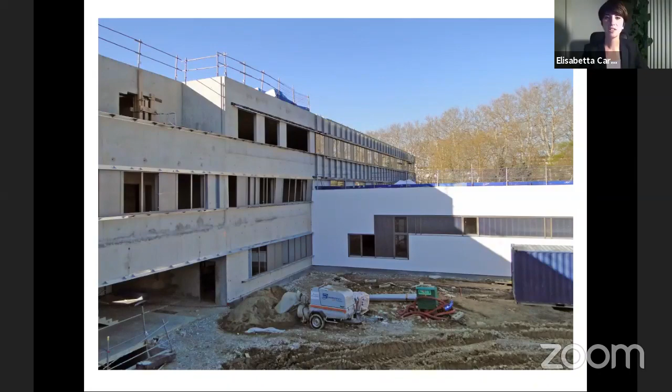And also I started realizing how our architecture was somehow a facade architecture. In many cases, I realized that there was the main material we were using, and then there was some facade material that was just concealing what we didn't want to see about our own design and our own constructions. And all of these things added up, and I started not feeling that well anymore about what I was doing. So I decided to take a sabbatical year, and I started wandering around South America, basically.

And at some point I was in the Chilean Andes, and there it was. I bumped into earthen architecture. That was a traditional way to build, and it made a lot of sense there because it's a place where it is virtually impossible to bring in material in order to build. So everything must just use what is right under your feet or just around you. And at the same time, it made a lot of sense, not only from a material point of view, but also when we look at the integration of this piece of architecture in its landscape, because it was made out of the very earth that was there. And you knew that one day it would be very easy to reintegrate it into the natural resource cycle.

And at the same time, this concealing idea was not there anymore, right? Every material was right there in its place with its function, but it was visible. So I was deeply fascinated, and I still thought it was something just folkloristic and that I would never see again when I went down from the mountains and into the city.

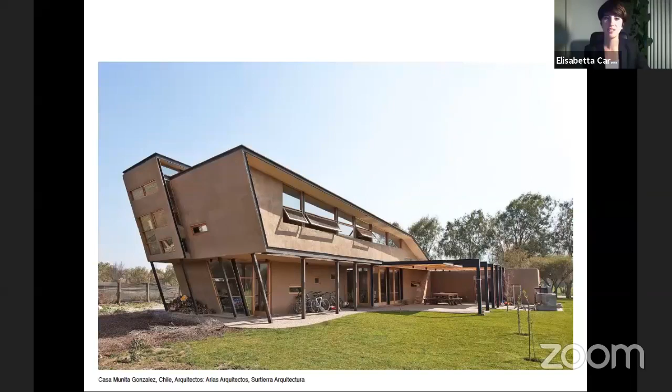But on the very contrary, I realized that there in Chile and in Argentina as well, there was a young generation of architects that was actually carrying on this material, because this material, earth, was never really out of fashion in construction. People were still using it, they never stopped. And therefore architects were trying to experiment with it and use it in contemporary design together with other materials, trying to literally reverse the use of the mud brick, like in this example.

So that was my aha moment. I thought, okay, this can be done actually, and it makes a lot of sense. It is an answer to contemporary architectural needs. I want to learn how to do it, and I want to bring this with me, and I want to diffuse this when I come back. So there it was.

I left the Andes for the Alps, and I moved to CRAterre. CRAterre is the largest world research center about earth. And it has a postgraduate cycle that lasted 2 years, where you basically are a group of 20 people from all over the world in love with earth, and you just keep learning and experimenting about this material.

I learned a lot, as you can imagine, about the material, about earth and heritage, but I wasn't really sure about how to use this material as an architect for contemporary architecture. How could I start the very same day to build with this material here and now? So together with another architect that had the same questions after this postgraduate, Annelise Antoine, we set up a research project.

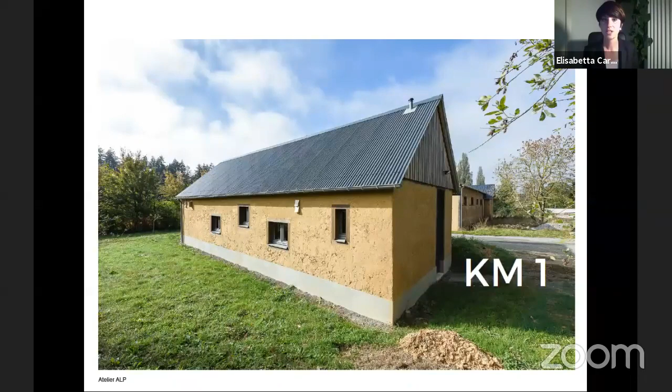First of all, earth is a local material. Local means really local. In very few cases, we are able to use the very same ground that we excavate in order to build, but in most cases, and I would say in any case where earth is used, earth comes from a very short radius. This means no transport. This also means that earth is an available material in an era where we are badly running out of sand, for instance, because of concrete construction. Having a material that is local and largely available is an asset, I think, for resilient architecture of tomorrow.

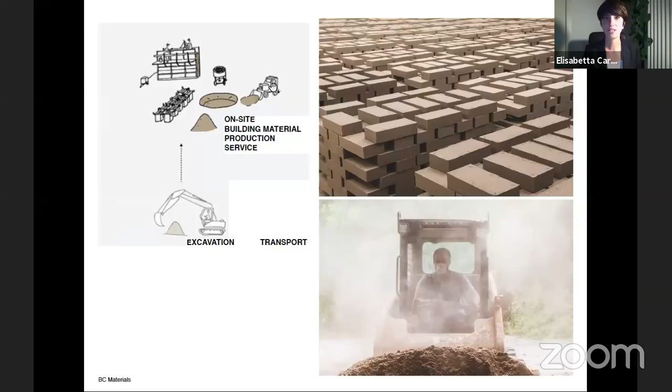Local also means that there are some pioneer projects like this one, BC Materials, a Belgian project from a Belgian cooperative. They are actually setting up an on-site building material production, so they are able to come to the site and to excavate and to produce the materials, like for instance the bricks or the plastering, just with the earth and just on site. This way they are minimizing really down to zero the transport, and I think it's an extremely interesting approach to construction, right? Nowadays our materials travel a lot of kilometers.

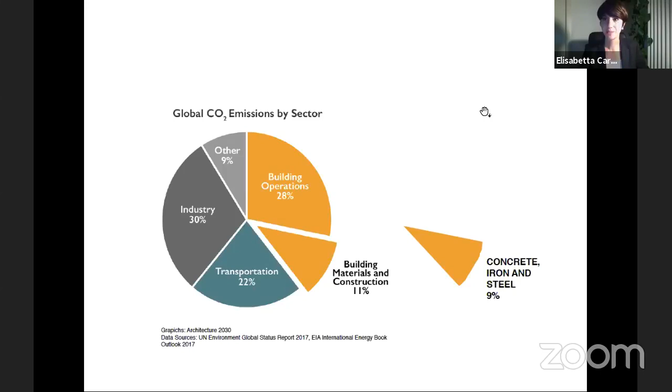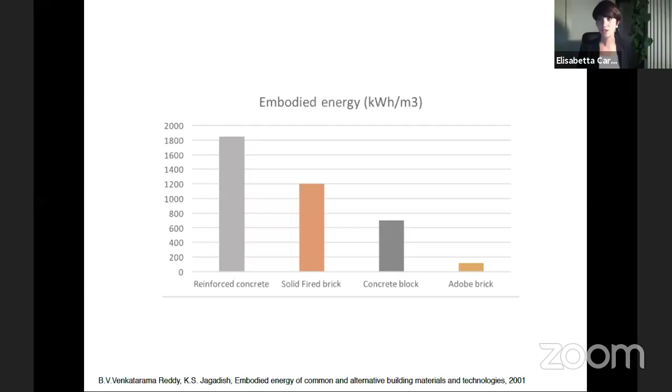Third, once we have built with earth, our building can be pretty energy efficient. I'm not saying earth is the perfect material, but it's a material that has very important properties that are really useful when we have to design our indoor comfort, our thermal and our moisture levels. First of all, it's a material that has a very important thermal capacity and thermal mass.

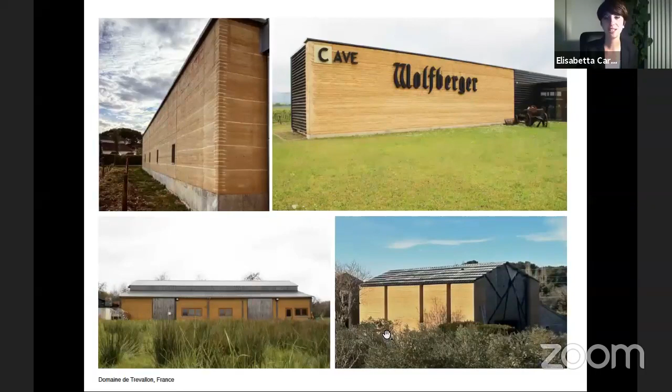And of course, it is very useful when we have to store something that we want to keep at a very uniform level of temperature and moisture. This is one of the reasons why we have so many earthen buildings that have to do with wine production and cider production, as you can see here. But also museums, of course, because what I have in a museum normally requires a very stable temperature and moisture level. But of course, we also want that for our homes, right?

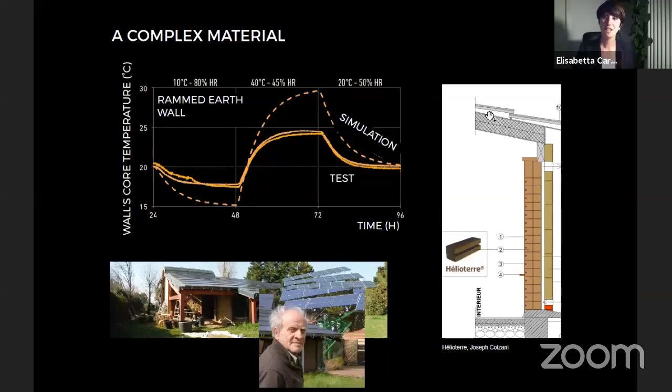Earth is one of the very few natural phase-changing materials. What is a phase-changing material? Laboratories are trying to synthesize very advanced synthetic phase-changing materials. These are materials that have some particles inside of them which are able to evaporate and to condense. This releases and absorbs energy, just the way we would like. When the temperature is going up, we have evaporation, and this evaporation absorbs energy. So if it's getting hotter, my wall helps my indoor climate to stay fresher.

And the other way, when the temperature goes down, these particles are condensing inside the building elements, and therefore they are releasing energy just when I need it. Well, as you can imagine, this fluid that we have inside of earth is water. There are some particles of water that are always present in an earthen wall, even when it's completely dry. They are always there, stuck in between the clay particles of earth. And this is why its thermal behavior is so interesting.

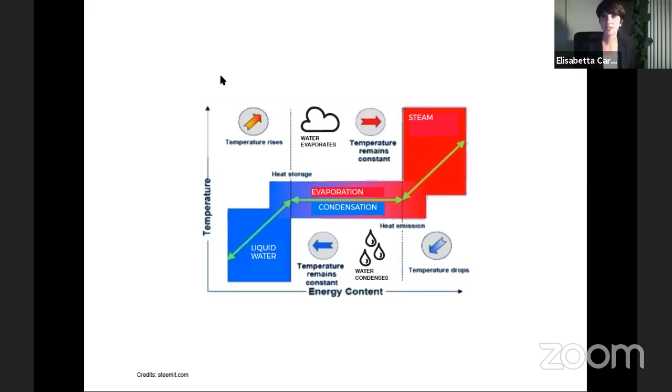And the fourth point about sustainability and earth is that it is 100% recyclable. This means it can really operate in a circular economy approach, a topic that is really hot nowadays. How can we make our economy circular? How are we able to minimize waste and reuse what we've been using already? This is very important, especially for us as designers, because 40% of the generated waste in the European Union is due to the building sector. It's enormous.

Okay, we are recycling, we are separating our garbage every day. We're doing really well, but then we are dumping an enormous quantity of non-recyclable material because of our buildings. So how can we revert that? How can we change this paradigm?

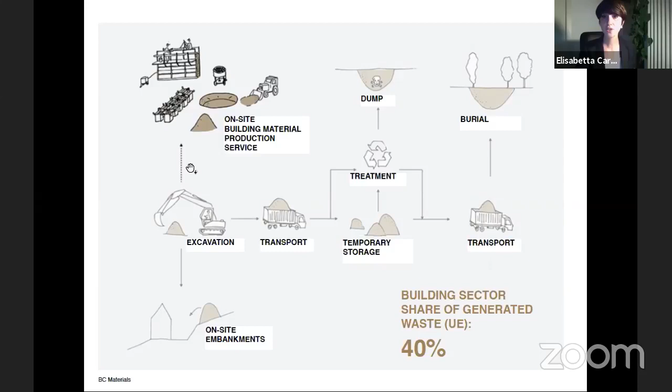Once again, I'm showing you another part of the project by BC Materials, this pioneer cooperative in Belgium. Not only are they producing materials on site, but they are also rethinking how, once this material has been used, when they have to dismantle an earthen building, they can actually reuse this earth, either giving it back to earth, which is what they propose here with the burial. So the earth is able to go back into a natural circle.

Another really interesting way to exploit earth recyclability is to use all of the excavated earth. Cities and countries in general tend to excavate enormous volumes of earth. And this earth is considered as a waste material, as a useless material that is going to a dump. It even has a cost to be disposed of, instead of using what could be a perfectly suitable building material.

1 year ago, finally, a project was set up in order to try to avoid this crazy dynamic. The name of the project is Cycle Terre, Earth and Cycle. It's a European funded project and it takes place in the metropolitan area of Paris. The metropolitan area of Paris is extending its underground network. This means kilometers and kilometers of tunnel are going to be excavated between now and 2030, which means 400 million tons of earth are going to be dug out, excavated.

So this project thinks about what to do with this earth. How can we use it as a building material? So the project put together a series of stakeholders, of partners, which are, of course, researchers and architects, but also real estate developers that are actually being taught how to use this material later on in their projects.

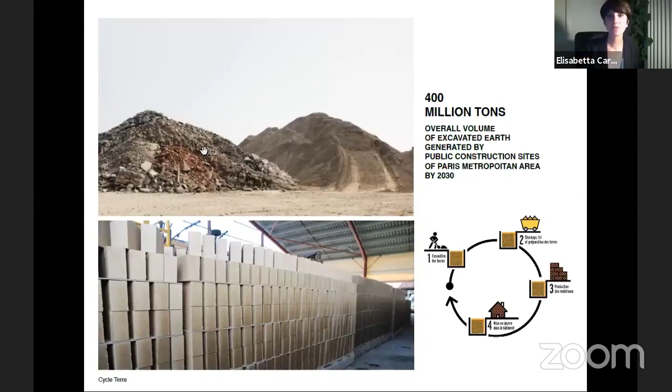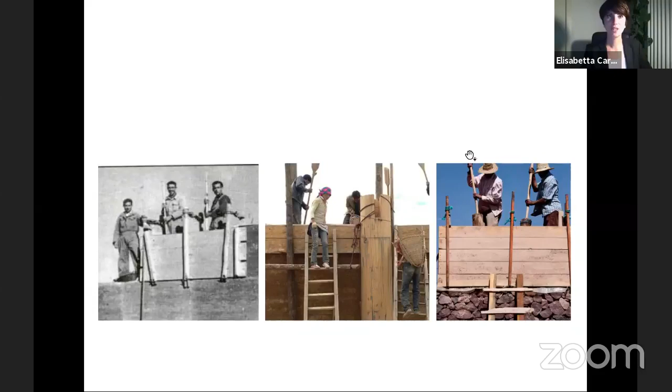Here you can see some Catalan rammed earth workers. As I said, until the 70s we have traces of buildings that were built with this material. And it is very curious that the rammed earth technique is actually the same technique that is used also in Asia, this picture is from Korea, or in Africa. It is really the very same technique developed in different corners of the world. And sometimes having this heritage can really be a trigger for building with earth.

It's the case for this enormous project that I'm really glad I'm helping with. It's in Saudi Arabia, next to a heritage site which is built with adobe. And the government decided that they would build an enormous extension around this heritage site that would all be built with earth.

It is going to be a very big project, but also a very big challenge for earth to answer contemporary needs, because this area will have, of course, museum, but also residential spaces, and they will have to keep with contemporary building standards. All of this with adobe, which is probably the most forgotten earthen technique in contemporary architecture. You see everywhere rammed earth that is on trend.

Adobe bricks need a lot of surface in order to dry under the sun, and this is why they are really not matching our industrialized building culture. But it is a technique that has a lot of potential, and I really hope this project will help showing and demonstrating this.

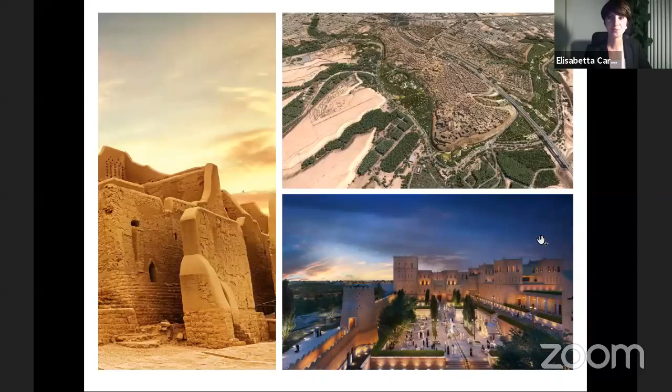Heritage is not always a good point for building with earth. Sometimes it can be the trigger for it, but sometimes on the other way, there is a bad stereotype about earth. This is due to the fact that earth was a popular building material for popular social classes. So it was used in vernacular architecture, in farms, in rural areas, and sometimes, therefore, it got associated to poverty and even sometimes to bad quality buildings. So this is why sometimes it is a material that has a stigma that got rejected.

And nowadays it really has to reprogram its image. To give you an example, this is one of the projects that I saw in my road trip, in northern France. And that's a region where the traditional earthen technique is cob. Cob is a very nice technique using earth at the wet state and just molding it as if it was a sculpture. It's a beautiful technique. It's a technique that makes most sense in this region where it rains a lot.

But it was a social housing project in the 90s, and people absolutely rejected the idea of going to live in cob houses because they associated that with poverty, and they had the feeling that the government was trying to sell them some houses that were bad quality and not of the right standards.

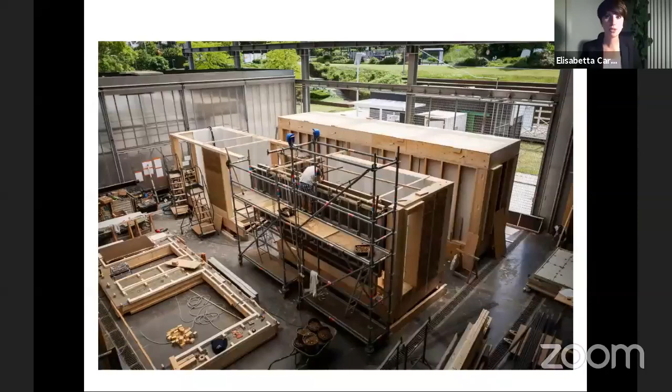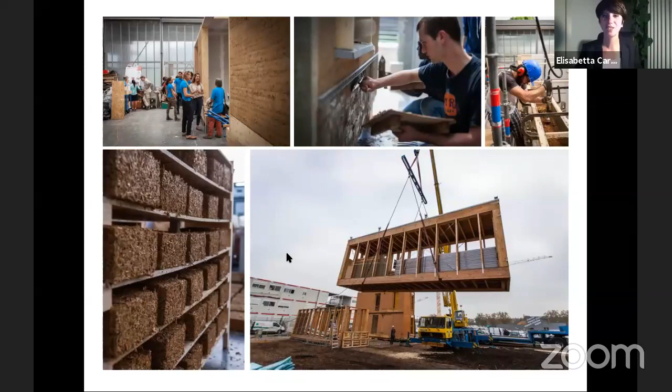And as you see, it was combining wooden structure and earthen filling in different forms, in rammed earth forms and also in earth and fiber blocks, as you can see here. And I really saw with my eyes students doing all of this, students just like you. They did the rammed earth, they did the plaster, they did the earth and fiber blocks, and at the end they assembled the building, they disassembled it, they transported it to Lyon city, and they built it again in order to stand there as a visitable prototype.

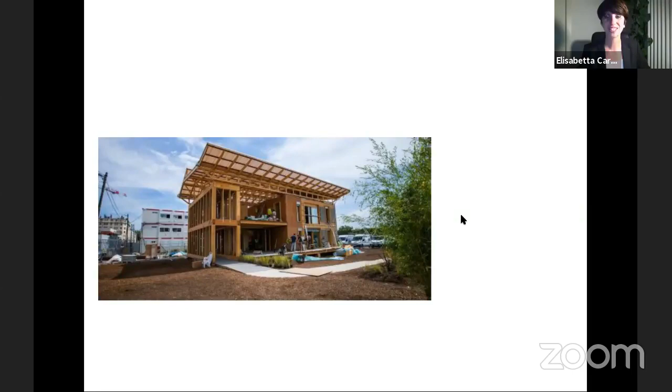So yeah, students of your age built this together with a little help of cranes and transportation system. And this was the result. It was definitely inspiring, and the construction of the real buildings is starting this year.

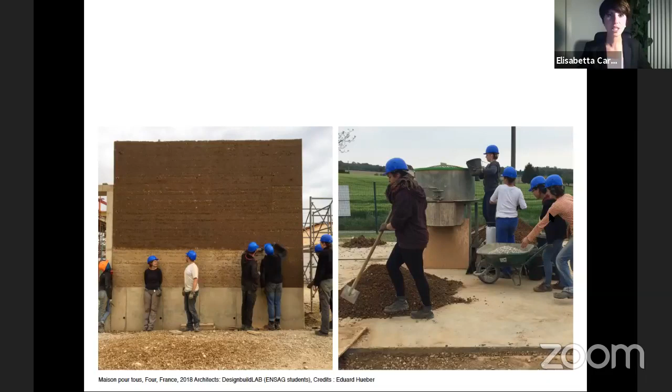And this year, the same school, the same Grenoble Architecture School, did it again. Actually, the students designed and built, of course, with some professional help, a community center in Four, in a village nearby. And this is the result. This community center already won 2 important awards, the American Architecture Prize of this year and the Architizer Prize.

And it really stands as a very interesting experience to have a whole building designed and built by students with 100% natural and recyclable material. It is definitely an asset. 5, Earth is going strong. It is going strong in many senses, right?

We have the idea, sometimes the stereotype, that Earth is a weak material, that it can't be load-bearing, for instance. And here you can see this challenge that BC materials took on of reformulating the best rammed earth possible and building a 15 meters high self-load-bearing wall. So you can see here how on one side the technique is growing and advancing and is actually enabling us to control more the structural performance of Earth.

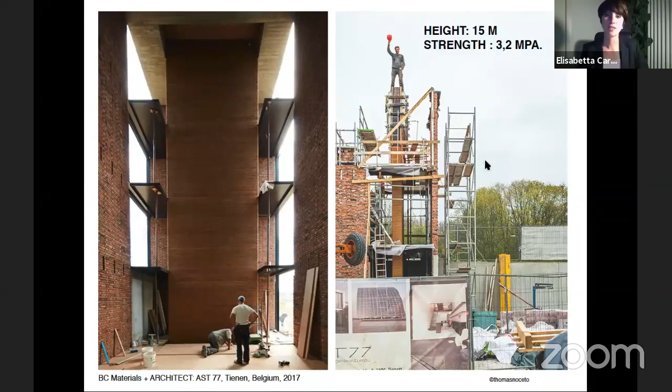But it's not just about structure. We are also advancing a lot in what is the prefabrication. You can see here Martin Rauch. I'm pretty sure you've heard of him. He's the principal pioneer craftsman doing rammed earth, and in particular prefabricated rammed earth.

As you can see here, this huge workshop allows him to have a 100-meter long span of wall, and just be able to cut it and to transport it like huge blocks, like huge bricks. This is really the top-notch level of prefabrication, but prefabrication is also getting current in ordinary rammed earth construction, as you can see in this other project, which is a healthcare center in a French village.

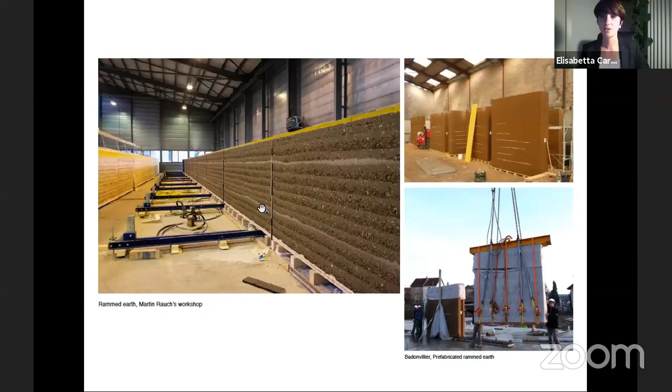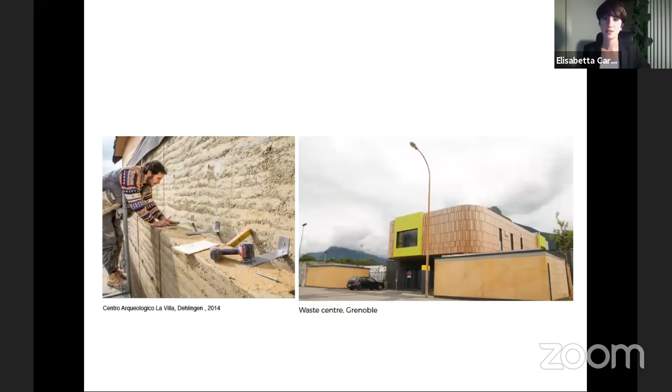There is this experimentation about poured earth, which means using earth pretty much as concrete and stabilizing it with cement. So it is not really a sustainable solution yet, but the experimentation is going on, and maybe sometime soon we will be able to actually use earth in a liquid state inside of a framework as we do now for concrete, without adding stabilizer like cement. And then, of course, there is 3D printing.

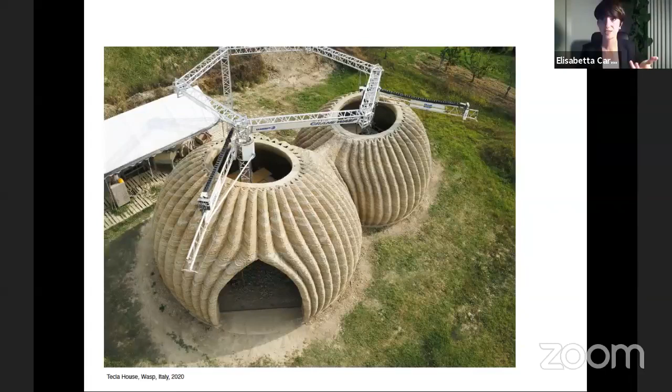And it is a technique that has a lot of potential, because it can really combine parametric architecture and all of the advantages of having just one system integrating many aspects and many functions with a sustainable material like earth. So on one side, earth is going strong, and on the other side, we also have to know where to stop and know where to actually embrace vulnerability.

This is a very nice quote by Anna Heringer, an architect that works a lot with earth. And I think it marks a very important point, right? We are there to improve the performance of Earth, of course, but we also want Earth to be what it is, to be Earth, right? We have a lot of projects nowadays that are being published, and they use earth just as if it was concrete. And in order to do that, they add cement inside of the earth.

And this is a pity, because at the moment we add cement, our earth wall starts having the same cement content as a concrete block. And it loses all of its sustainable potential, right? The low embodied energy is gone. The recyclability is also gone. We really lose a bit the path of why we want to use earth.

This is, of course, my own personal opinion, but I think we can really take it as a challenge and not just as a limitation, and see where this vulnerability of earth is. I'm talking about the fact that earth cannot be directly under the rain. You can see here it is, but normally if you have natural earth and you leave it uncovered on its top face, the rain is going to penetrate inside of this wall and bring it back to mud. It is recyclable for real. This means it can happen during the building life if we don't protect it adequately.

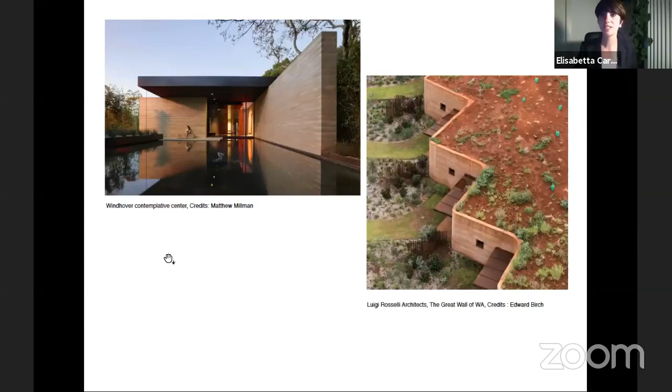And maybe we can just use earth according to what it is and to this characteristic it has, and see where it leads us. Maybe it will lead us to an architecture that doesn't look like concrete architecture. For instance, here, the fact that earth has to be protected beneath a roof, but at the same time that earth can be a completely flexible material, led to a much more interesting architecture than if we just had a straight concrete wall, I think.

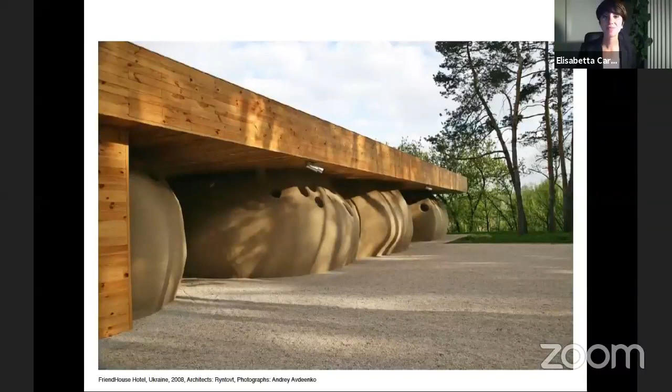These kinds of spaces are really peculiar to a material that is completely flexible like earth. Seven, earth is sensual and it's getting naked. Okay, I want to stress the fact that earth is a material that really wants to be touched. I'm pretty sure if you passed in the IAAC hall and you saw these 3D printed earthen models, you had the temptation of going to touch them.

It's a material that, since it's natural and it's so rough, and it has all of this texture and all of these grains, really calls for contact. To me, it was a big challenge to design a yoga center. It was also very nice to have to think how a person experiences architecture, not just through the sight, but also through the touch and the feel, and how every type of person would feel when surrounded on every side by earth.

Would it feel like being underground? Would it feel warm? To me, it was really interesting to answer this question, and also to have the feedback of all of the users of this space.

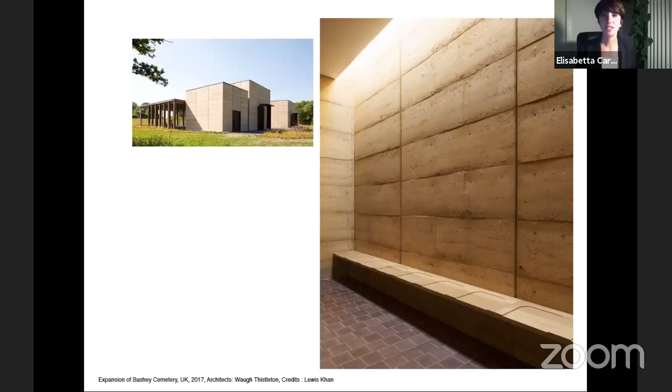And of course, I think earth is also a way to bring some touch and some texture and some nature to places that normally are really artificial and cold, like, for instance, a cemetery or a hospital, a healthcare center. These places tend to be all clean and smooth and white, and maybe adding the roughness and the texture and the naturality of earth can help us create different spaces for these functions.

And as you can see, another of my concerns as a designer was the fact that materials are being concealed, and I think earth also gives some interesting hints in this sense. We are tending more and more toward an architecture of materials, where materials are the real luxury. Materials and showing them is what really makes the quality of the space. And in this game, earth, of course, can really play its role.

And eighth and last point, earth is trending. This, I think, is a very strong point when we think of this material, because maybe we will really have the chance to have earth as a current building material in the next years. Let me be honest, earth is not a new material. It can be innovative to use it, but we've been using it for quite long. We're talking about, what, 10,000 years?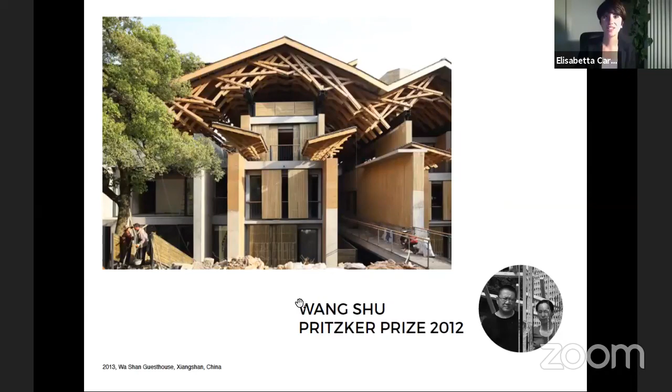Big architecture stars are starting to use earth. We have the Pritzker Prizes, Wang Shu, Renzo Piano, they are using earth in their projects. So this will, of course, change a bit the status of this material. And public buildings are a very important trigger, because when a public building is realized, it means all of the regulation has to give an answer about how to use this material. And in general, it really changes the image of a material as one that really has a reason to be used.

We are facing a crisis, as you know, and following this crisis, which was triggered by COVID, there is a very big rescue plan in Europe that is going to bring an enormous amount of money, and it has sustainability as its first pillar, its first goal. Will this mean we will have more occasions, more chances to use natural materials in our projects?

I hope so, but I think as designers, we really have to be ready. We really have to be prepared and to give an answer to this global emergency we are facing. So I really hope I gave you some reason to be interested in this material and maybe even to love it as I do.